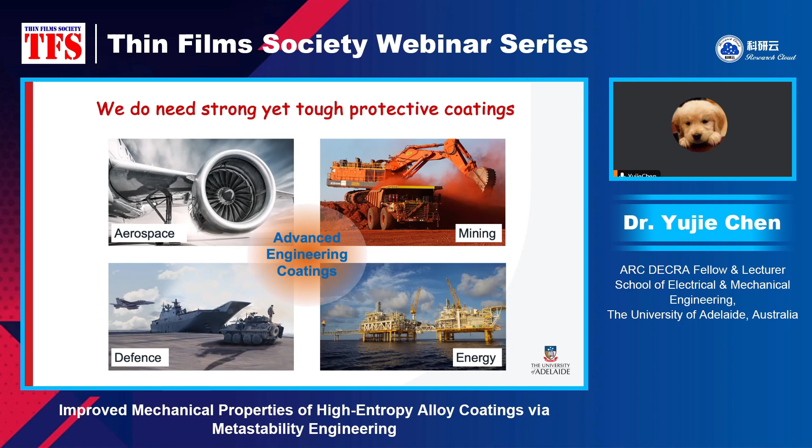As such, there is a pressing need to develop more durable protective coatings. That means the coatings need to be not only strong, but also tough, highly resistant to fracture, unlike ceramics, which often fracture catastrophically.

However, as we have learned from material textbooks, most conventional strengthening approaches can strengthen the material but at the expense of ductility. That means stronger materials are usually brittle. This is the strength-ductility trade-off that has been lasting for many years in metallic materials.

The ultimate goal of structural materials, including the protective coatings we just talked about, is to make materials stronger without compromising ductility. That means for coatings, in addition to hardness, they also need to have the ability to undergo plastic deformation so they can be strong and tough. So our research aims to overcome this strength-ductility trade-off, developing materials with enhanced mechanical properties through metastability engineering.

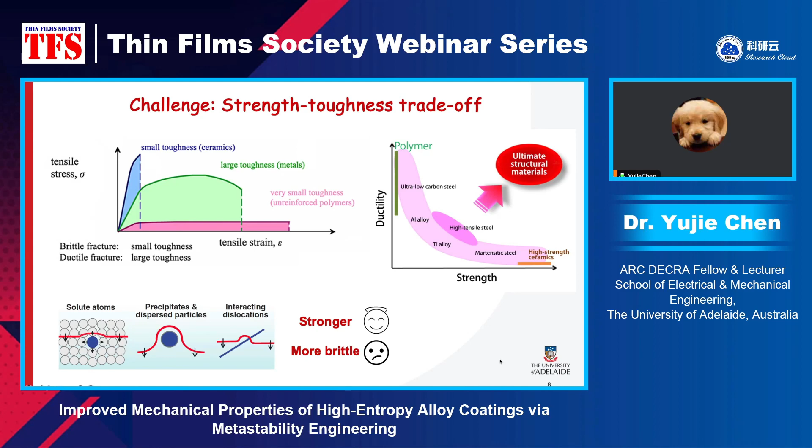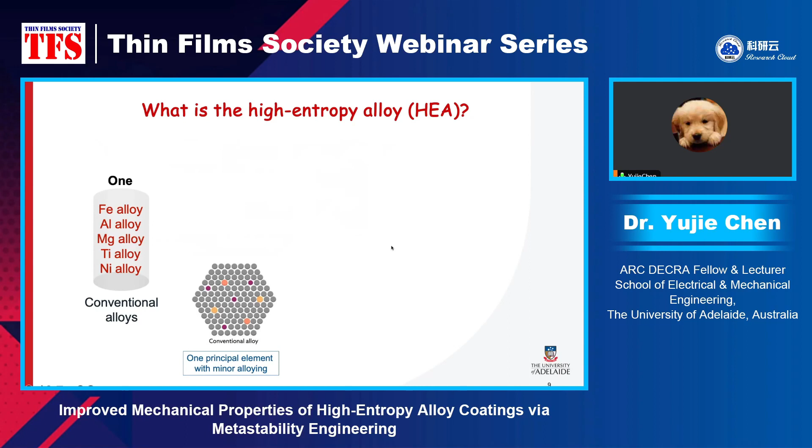The coatings that I have been working on are high-entropy alloy coatings. You may have heard of high-entropy alloys. They are a rapidly emerging class of alloys that are quite different from conventional alloys. We know that conventional alloys are usually based on one principal element.

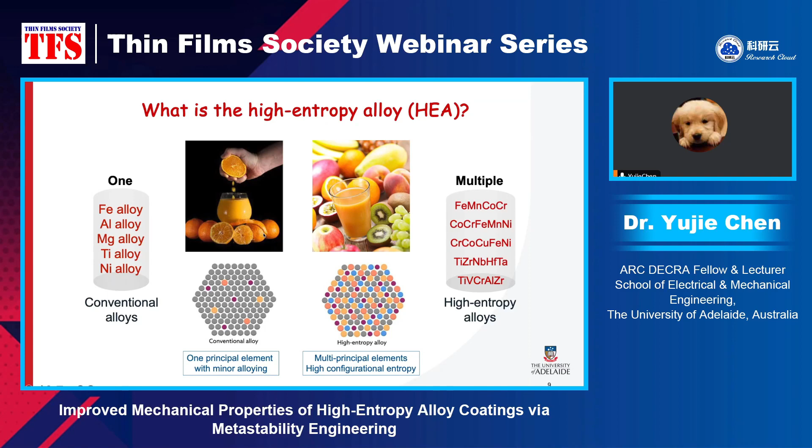However, the high-entropy alloy incorporates multiple principal elements, all in high concentration. Imagine these elements as different fruits. The orange juice will be the conventional alloy, this one here. Well, this mixed juice will be the high-entropy alloy. We know that the mixed juice has more balanced nutrition and flavors. So that's the high-entropy alloy.

With such a novel alloying strategy, high-entropy alloy offers a new avenue for realizing exceptional mechanical, physical, and chemical properties. High-entropy alloys show promise in overcoming the strength ductility trade-off that is common in metallic materials. Therefore, they also offer a compelling prospect for long-lasting surface protection.

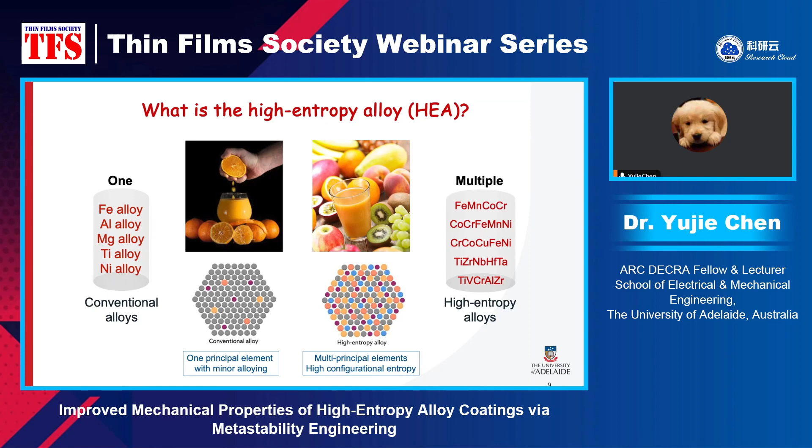But to overcome the strength ductility trade-off, we do need to apply some structural and mechanism design, such as metastability engineering.

Now let's have a look at how the metastability engineering strategy works. Basically, it tunes phase stability. As you can tell from its name, metastability, the word metastable means something that is not very stable. So in contrast to the conventional alloy design, where we try to achieve the stable phase, in this one, we try to achieve the metastable phase.

So we make the phase not very stable, so the phase transformation can occur. The idea here, basically, is to tune phase stability to promote formation of desired phase structure, such as the dual phase structure, and to trigger the deformation mechanism. Normally, it's TRIP and TWIP.

You may have heard of TRIP steel and TWIP steel. The TRIP is transformation-induced plasticity, and the TWIP is twinning-induced plasticity. So here, we try to trigger the phase transformation and the deformation twinning. As a result, we will achieve high strength and ductility.

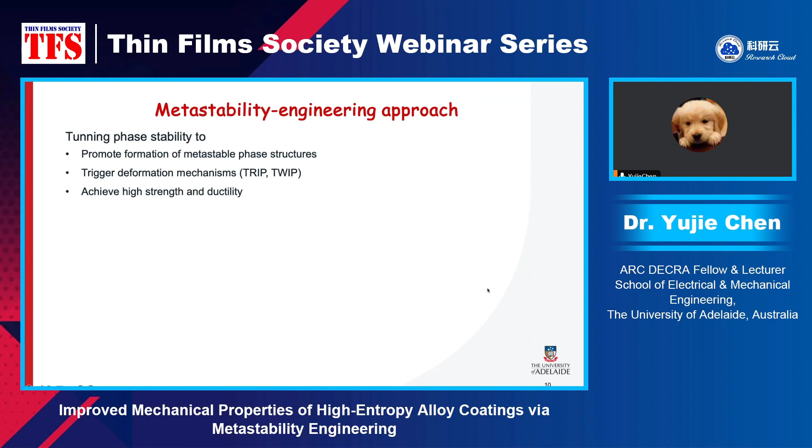Let's take an example. For if we're working on an HCP or FCC structure, we know that stacking fault energy is very important because all this deformation mechanism is closely related with this stacking fault energy. So if your material has a high stacking fault energy, the deformation will be mediated by dislocation gliding. If the stacking fault energy is very low, the phase transformation will occur. If you have something in between, the deformation twinning will carry out the plasticity.

So when we tune the phase stability, it's important that we pay attention to this stacking fault energy.

The metastability engineering approach is not something new. It has already been widely used in high manganese steel and titanium alloy to promote strain-induced phase transformation. High-entropy alloys are very suitable for applying metastability engineering, since the high-entropy alloy concept widens the alloy design window for tailoring phase stability, stacking fault energy, and also the associated deformation mechanism.

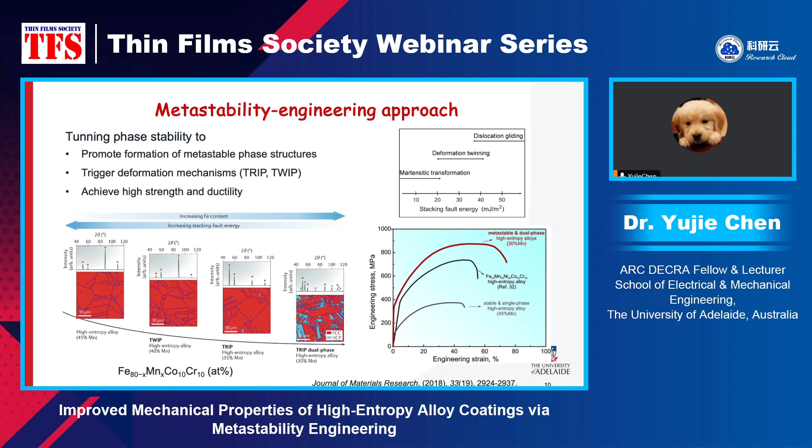Normally, to apply the metastability engineering in high-entropy alloys, the phase stability is tuned by adjusting the concentration of metallic alloying elements, like the example I showed in the previous slides. Another way to tune the phase stability is to add interstitial elements, but normally it's at very low concentration. We will talk about this later.

However, in our work, we added a large amount of interstitial nitrogen to tailor the phase stability. The reason for doing that is, in addition to phase metastability, which will give us dual phase structure, deformation twinning, and phase transformation, we will also benefit from the massive solid solution strengthening caused by high nitrogen intake.

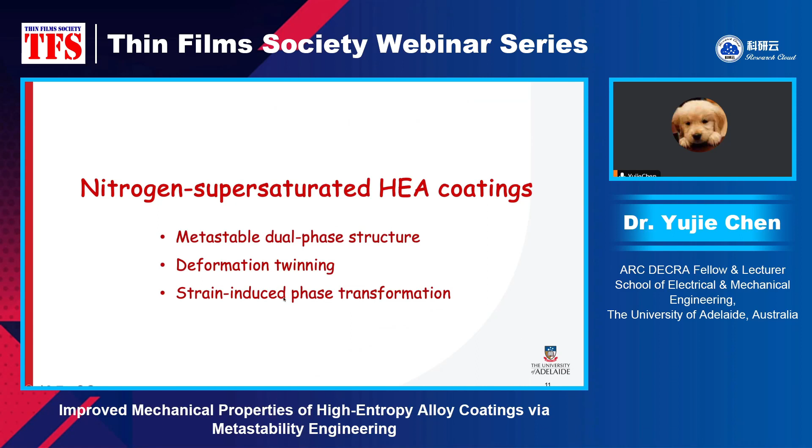Let's talk more about this interstitial solid solution strengthening. Adding interstitial elements to high-entropy alloy was based on a few considerations. The first one is about solid solution strengthening. We know that the addition of interstitial elements enhances solid solution strengthening, still causing lattice distortion, because it changes the configuration of this lattice structure.

In addition to that, interstitial elements can also tune the phase stability. So it is possible to achieve excellent mechanical property through metastability engineering by controlling the interstitial content. The phase stability also depends on the amount of interstitial elements that you have added.

Another very important consideration is about the cost. Many of the current developed high and medium entropy alloys use very expensive alloying elements, such as nickel and chromium. We know that the application of high entropy alloys are greatly limited by their high cost. So to reduce the cost, we can add much less expensive interstitial elements, such as carbon, nitrogen, or oxygen.

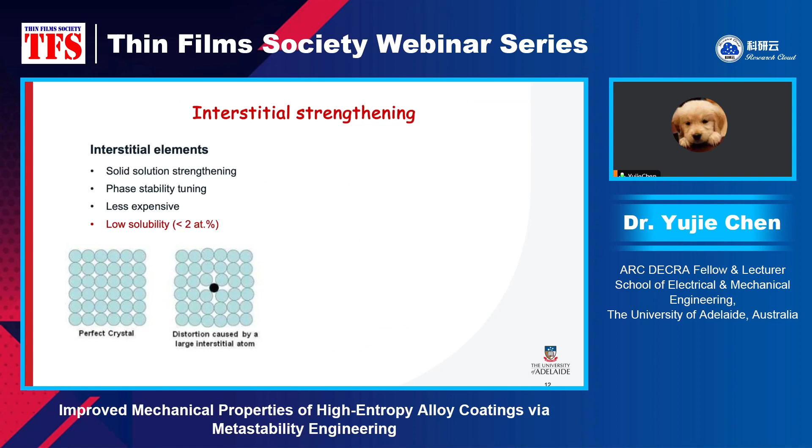So it comes to a question: if we can only add less than 2 atomic percent interstitial elements, it will not help us reduce the cost. And if we want to enhance the solid solution strengthening and tune the phase stability, we may need to increase the amount of interstitial elements. Then it comes to a question: is there a way that we can dissolve a high concentration of interstitial elements in high entropy alloy without the formation of brittle ceramics?

The answer is yes. Magnetron sputtering can do it. If you're working on thin film and coatings, you should be quite familiar with magnetron sputtering. It is a physical vapor deposition technique used for depositing high quality coatings. It's a bottom-up approach, so the rapid quenching effect is very important. It deposits the coating layer by layer, atomic layer, so the cooling rate is super fast. The high cooling rate will suppress the diffusion.

If we suppress the diffusion, we will suppress the formation of nitride, because nitride formation requires the metal elements and nitrogen to come together. So if we suppress diffusion, we are going to form a random or disordered solid solution phase. That means we can dissolve a large amount of interstitial elements. This rapid quenching effect promotes the formation of disordered solid solution phase. So by using magnetron sputtering, we are able to produce a solid solution phase supersaturated with nitrogen without forming any nitride. This is what we would like to achieve.

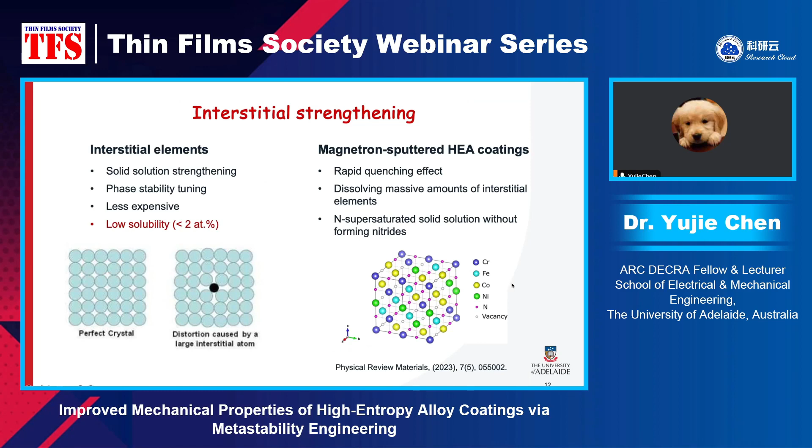Then we prepared 5 high entropy alloy coatings using this magnetron sputtering technique, at different nitrogen gas flow rates: 4, 8, 10, 15, and 20 SCCM. Different nitrogen gas flow rates give us different nitrogen content in the coating.

So this is a schematic illustration of the magnetron sputtering. I'm not going to discuss too much on this. You just need to know the rapid quenching effect—it will suppress the formation of nitride and promote the formation of random solid solution.

But normally, the higher the nitrogen flow rate, the higher the nitrogen concentration in the coating. Here I'm showing you the composition of these 5 coatings. As we can see, the nitrogen content, shown by this blue and green line, increases from about 7 atomic percent to about 30 atomic percent when the nitrogen gas flow rate increases from 4 to 20 SCCM. At the same time, as the nitrogen content increases, all the metal content decreases. But the ratio between these 4 metal elements agrees very well with the target composition.

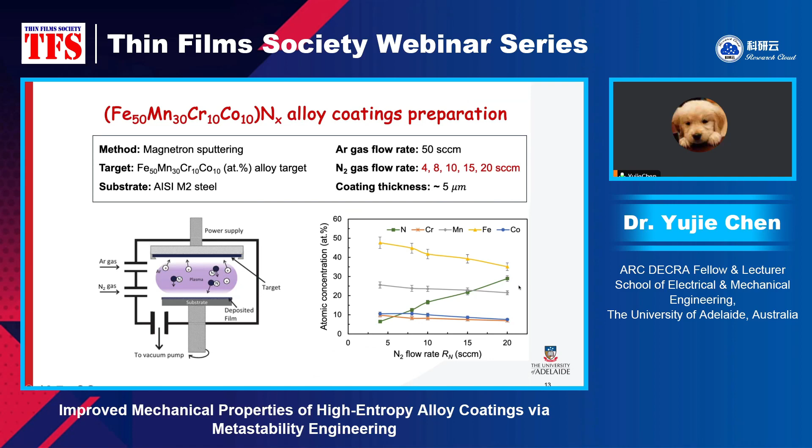So we have included such a high content of nitrogen in the coating, about 30%. Are we going to form a nitride? So we need to examine the microstructure.

Here are the microstructures of the 5 coatings with increasing nitrogen content. They all show columnar nanograins. From the low magnification TEM images, we can see that the grain size increases with increasing nitrogen content. As we mentioned in a previous slide, interstitial elements can affect the phase stability.

Indeed, the high resolution STEM images here show the phase structure, and it shows that the nitrogen content has a strong effect on the phase stability and stacking fault energy of the high entropy alloy. As we can see, it forms an FCC structure when the nitrogen content is relatively low—a single FCC phase. As we increase the nitrogen content, at higher nitrogen content, they form a dual phase structure, both FCC and HCP, like a nano-layered FCC and HCP.

The volume fraction of these 2 phases changes with the nitrogen content.

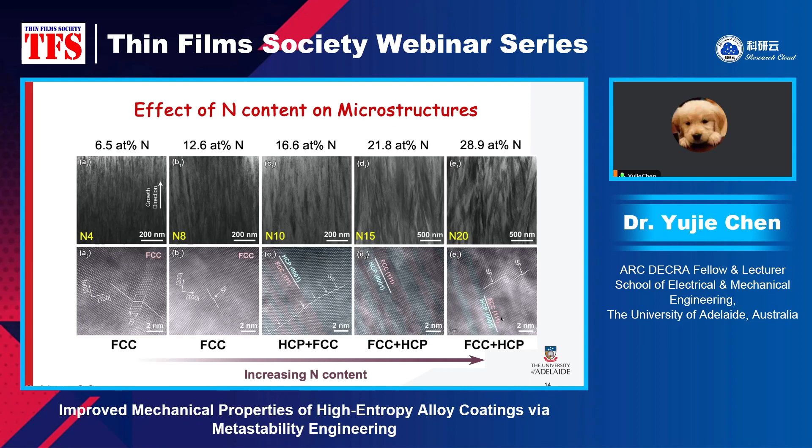So the highest nitrogen content is 28.9 atomic percent. But the high resolution STEM image doesn't show any nanoparticles of nitride. It looks like we have successfully dissolved a massive amount of nitrogen into the FCC and HCP lattice.

But to confirm the solid solution nature, we performed XRD, EDS mapping at microscale, and also EDS mapping at nanoscale. All these results were performed on the N20 sample, the sample with the highest nitrogen content. If this one doesn't show any nitride, all the others should be solid solution phase.

So we can see that all these results indicate homogeneous elemental distribution, and there is no nitride formation, even though for N20 the nitrogen content is as high as 29 atomic percent. So these alloys are not yet nitride, but should be described as a dissolved solid solution, supersaturated with nitrogen. So the conclusion from this slide is that there is no nitride formation. They are just a nitrogen supersaturated solid solution phase.

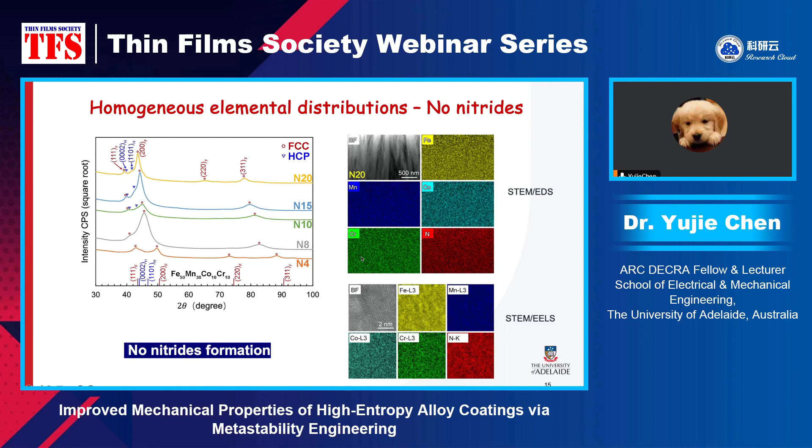Now let's look at the mechanical properties, basically hardness and Young's modulus. We can see all 5 coatings show high hardness, but none of them show surface crack after the indentation, which was a spherical nano-indentation. We didn't observe any surface crack for all the samples.

But from the cross-sectional SEM image, we cut the indents using the FIB. We can see that the sample with the highest nitrogen, N20, shows some lateral crack. It's not very clear here, but indicated by the arrows. While the others showed no crack, and at the same time they showed large deformability.

We also looked at the H/E ratio. This H/E ratio is an indicator of resistance against elastic strain failure, which has a good approximation to rank the fracture toughness of hard coatings.

As we can see from this Ashby type plot, this point is N15. It has a very high hardness value, comparable to ceramics, around 20. We know the hardness of titanium nitride is around 20 as well. So it's not yet nitride. N15 is still a metal coating, but its hardness is comparable to ceramics.

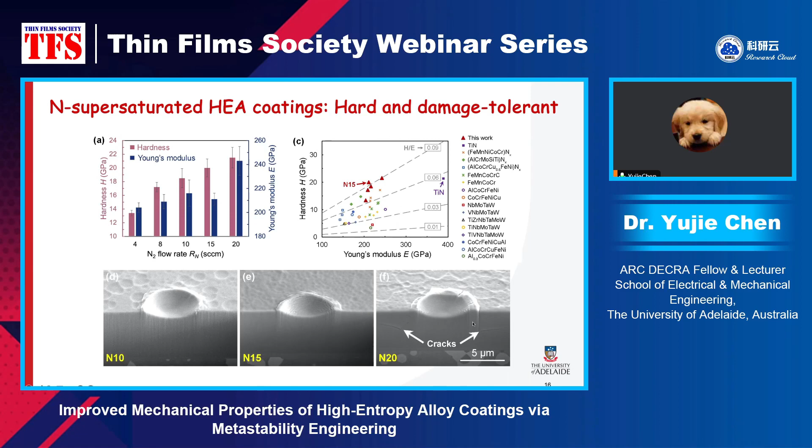And at the same time, it didn't show any cracks. It showed large plasticity. We know that titanium nitride is quite brittle, right? So that means this one is not only strong, but also tough. But what is the deformation mechanism that governs the plasticity? How can the coating sample deform plastically with such a high nitrogen content?

To understand the deformation mechanism, we compare the microstructure before and after nano-indentation. For the FCC structure, we selected 2 samples: N4 with the FCC structure, and N15 with both FCC and HCP structure.

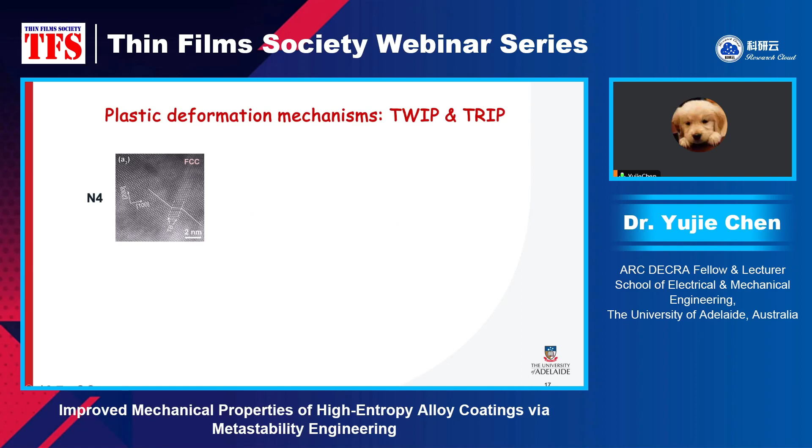For the FCC structure sample N4 with a relatively low nitrogen content, we see that after deformation, extensive deformation twins were observed in the deformed sample, as can be seen in both low magnification and atomic scale STEM images. So that means deformation twinning happens during the deformation.

And for another sample, N15, the dual phase one, the highly deformed region shows a predominant HCP phase. So from a dual phase to a single phase, that means all the FCC phase has gone, which indicates the FCC phase has transformed to HCP during deformation.

Although we have added a high content of nitrogen, the high-entropy alloy still can deform plastically like pure metallic material. When its ability to undergo large plastic deformation is combined with the massive solid solution strengthening caused by the high nitrogen intake, the material shows an excellent combination of hardness and toughness.

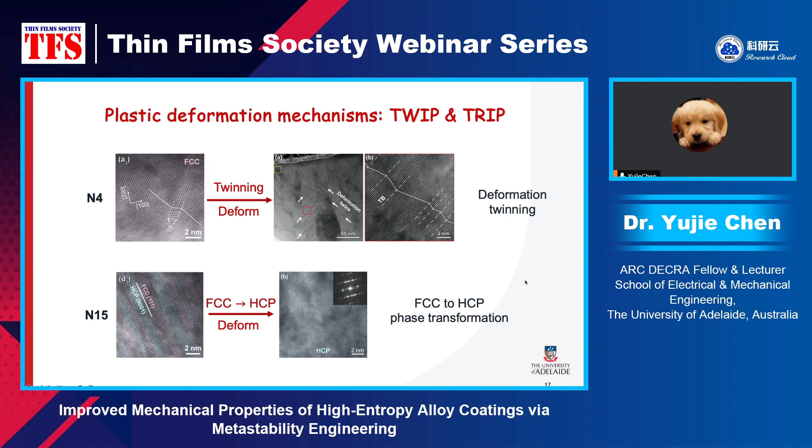So it's a quick summary of this study. Now we understand that nitrogen has a strong effect on phase stability and deformation mechanism. It's possible to apply the metastability engineering strategy in high entropy alloy coatings through adding high content of nitrogen. It can be nitrogen, or it can also be carbon or oxygen. And the massive solid solution stemming from the high nitrogen intake provides high hardness.

More importantly, even at high nitrogen content, they still have the ability to deform plastically like a pure metallic material. They can show deformation twinning and phase transformation. So therefore, they show high hardness and also high toughness.

As we increase the nitrogen content, there may exist a sweet point at which we achieve the best synergy of hardness and toughness, and it may not be this one, the N15. We think it will be more efficient if we can use theoretical calculation to guide the design of this metastable high-entropy alloy coating. So if anyone is working on theoretical calculations or simulations, we are happy to collaborate.

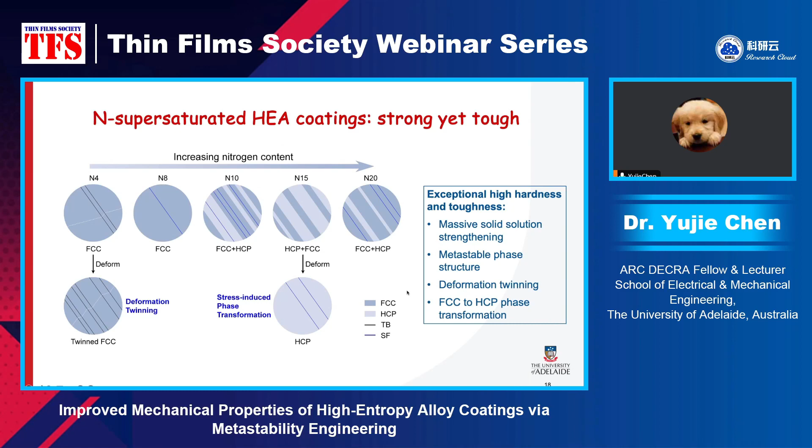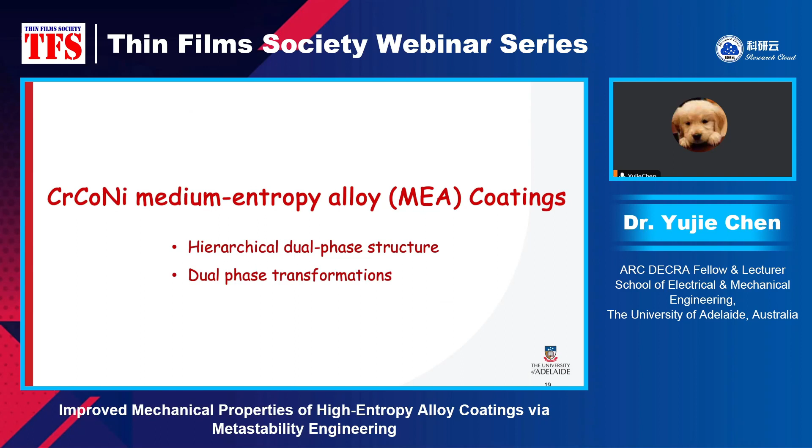So next, I'd like to quickly show you another example of metastability engineering, in which the mechanical properties are enhanced by dual phase transformation. In the previous study, the phase transformation was one step, and in this case it's a two-step phase transformation. Now let's have a look.

This time we choose to work on chromium cobalt nickel medium entropy alloy. This is because according to theoretical calculation, the FCC phase observed in chromium cobalt nickel alloy is a metastable phase, which was retained by quenching from high temperature.

We know that magnetron sputtering is a low temperature process, and the stacking fault energy of chromium cobalt nickel is pretty low, or even negative, according to theoretical calculation. So it will allow us to form the dual phase structure, both FCC and HCP.

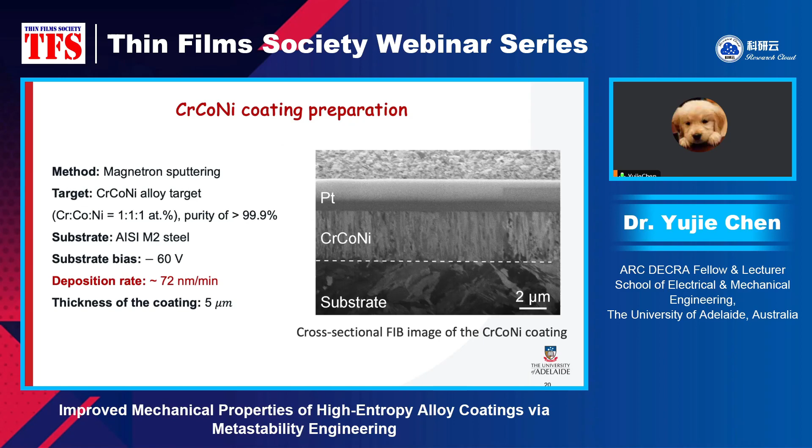Also, the deposition rate is very important, because the higher the deposition rate, the higher the possibility that you form planar defects like twin boundaries and stacking faults.

So here is the structural feature of this coating. We can see they have structural features at multiple length scales. Such a hierarchical structure allows for a unique combination of a variety of strengthening mechanisms at multiple length scales, which gives us exceptional high strength and ductility.

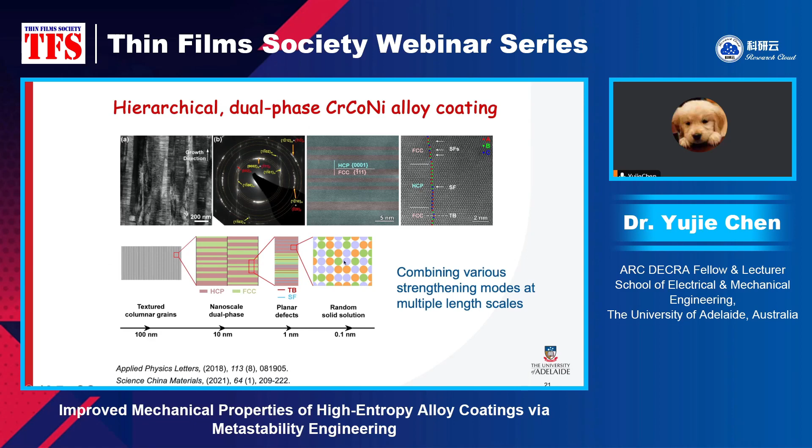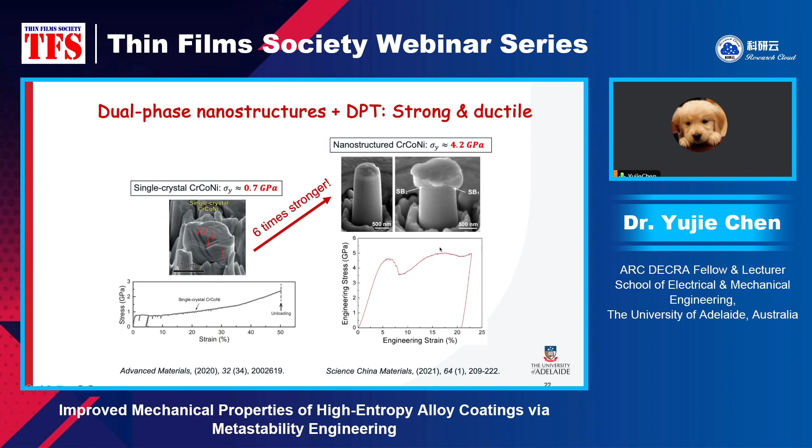And with such high strength, the nanostructured chromium cobalt nickel alloy coating still shows appreciable ductility, as we can see from this stress strain curve.

We found this alloy shows a very interesting deformation mechanism. That's the most important thing of this study: dual phase transformations. Basically, what we have done is after this micropillar compression...

we prepare a TEM sample of the deformed pillar, and in that pillar we see this shear band. Then we analyze the phase structure at different strain levels. If you're close to the shear band, the region has experienced larger shear strain.

So we check the phase structure in these four regions, and we found that the material has experienced a two-step phase transformation, from FCC to HCP and then back to FCC.

What is the benefit of dual phase transformation? We know that a single step phase transformation produces 35% plastic strain, but dual phase transformation will produce 70% plastic strain, which has been doubled, right?

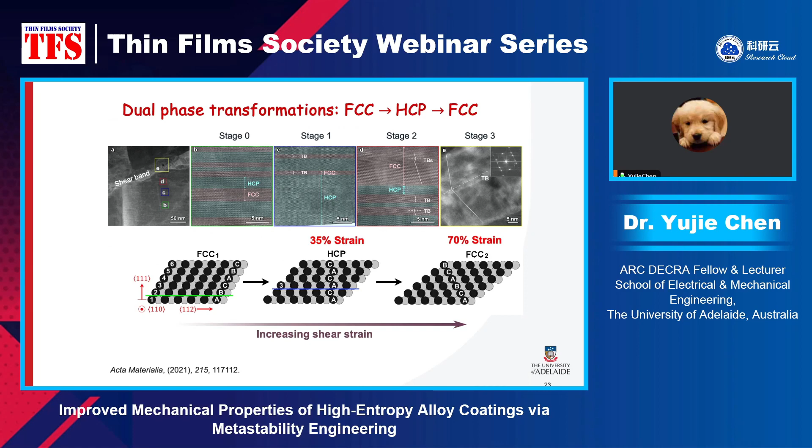In a following study, we introduced the dual phase transformation to a BCC structure high-entropy alloy through interstitial co-doping. But this time the interstitial elements are at very low content.

Our BCC structure high-entropy alloy shows an excellent combination of strength and ductility. We can see this from the barrel shape of the compressed micropillar. Where does this ductility come from? It's just from this two-step phase transformation from BCC to HCP to FCC.

Looking at the mechanical property from this Ashby plot, we can see the mechanical property surpasses many other high-entropy alloys in the literature.

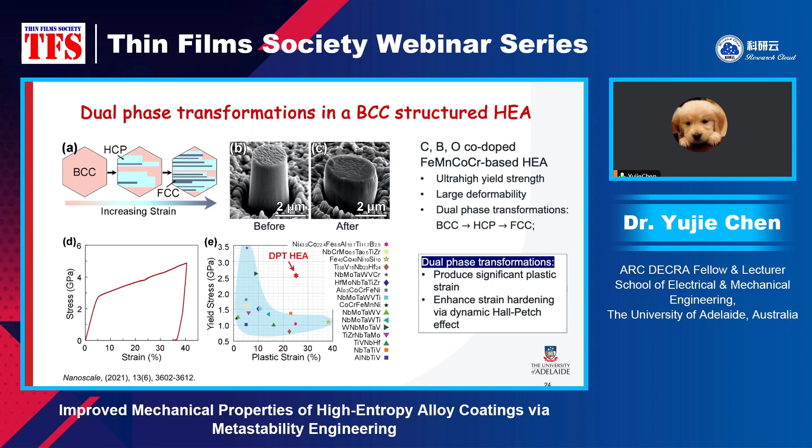To sum up, this talk mainly focused on the metastability engineering approach. What we do is promote the formation of metastable phase structures, such as the FCC and HCP dual phase structure, and we want to trigger phase transformation and deformation twinning, because this will give us larger plasticity that makes the material tougher.

To achieve this, we use magnetron sputtering, because the rapid quenching effect can suppress diffusion and promote metastable phase formation. With metastability engineering, we need to form the metastable phase first. Another important thing: if you want to make the phase metastable, the composition is very important.

In the first study, we tune the phase stability by adding interstitial elements; in our study, it's a high content of nitrogen. The magnetron sputtering allows us to dissolve a high content of nitrogen without the formation of nitride. That is the benefit of magnetron sputtering.